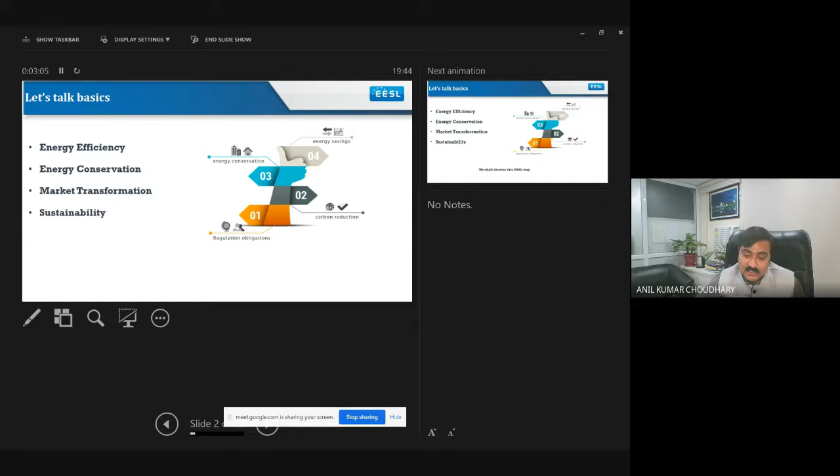We will see sustainability in some other form also in the subsequent slides. This is just to give an idea of what we will be talking about all the time in our energy auditing session. So let us discuss it.

First, let's go to the sustainable development goals, which have been defined by the UN. These are very well known to all of us: no poverty, zero hunger, good health, quality education, gender equality, clean water and sanitation, affordable and clean energy, decent work and economic growth, industry innovation and infrastructure, reduced inequalities, sustainable cities and communities, responsible consumption, climate action, life below water and on land, peace and justice, partnership for the goals. These are the things that make things sustainable basically.

Not only resource conservation and energy conservation, but all the things together make something sustainable. So if we are going for energy efficiency or energy conservation techniques, whatever the technique, we have to see whether we are meeting all these goals or not. If we are meeting all these goals, then our exercise will be sustainable. It's very clearly defined.

Let's take the first one, no poverty. How can this no poverty be related to energy efficiency? It may not be directly related, but if it is not related to the last mile person, then our efforts will not be sustainable. Even Gandhiji said that whenever you take any initiative, see whether it is going to affect the last mile person or not. So that way, sustainable development was already defined by him, which the UN is defining now.

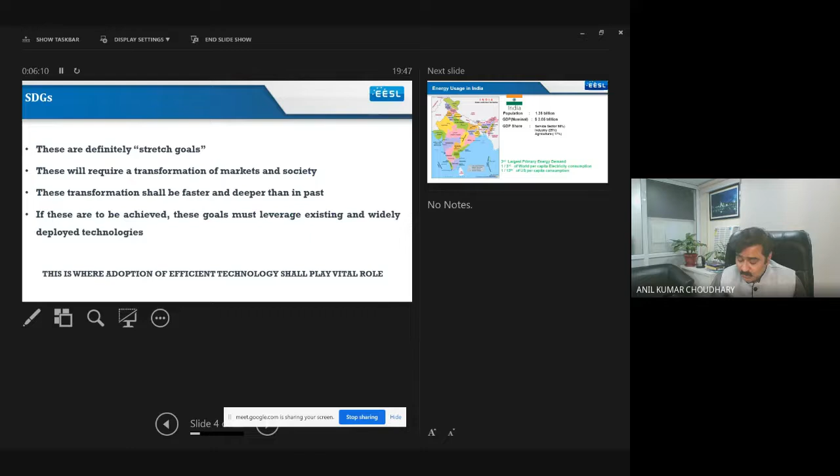These have to be very faster and deeper. Whatever, so we have to deploy these. If these goals are to be achieved, existing technology and new technologies and new ventures must be leveraged. So this is where the adoption of efficient technology shall play a vital role. So that is in a nutshell how energy efficiency and the use of various kinds of technology are going to achieve these sustainable development goals.

So if we are talking about energy, let's see what's the energy usage in India. These are some statistics. Population is there, GDP is there, GDP share is there. You see, India is the third largest primary energy demand, but it is one third of the world per capita energy consumption, and 1/10th of the US per capita energy consumption.

So on average, we are not even in the average in terms of our energy consumption. What does it mean then? It means that if we are increasing our per capita electricity consumption, our living standard and everything is going to increase. So it is going to put more pressure, even more pressure, on our energy security. That is why energy efficiency becomes even more pertinent for India, because energy requirement is going to increase anyway. So let us see the sectoral share of this.

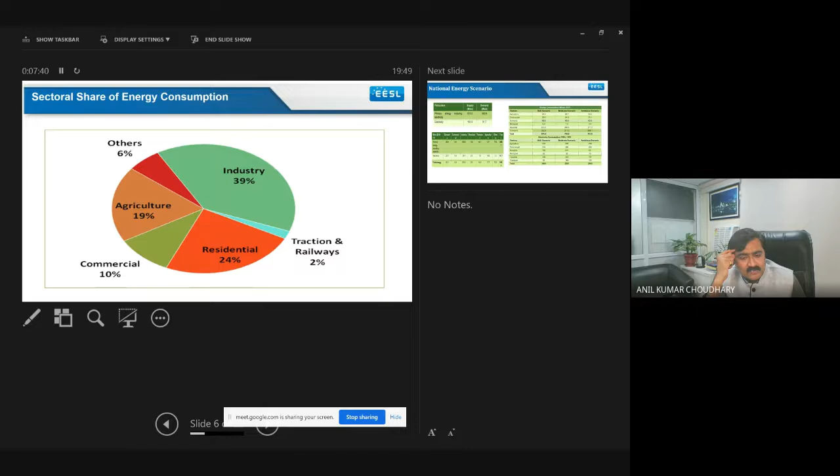Energy efficiency: industry is 39%, residential or domestic is 24%, commercial 10%, agriculture 19%, traction and railways 2%, and others 6%. So this is the actual usage. We can see how industry is affecting our energy efficiency, and residential has also got much scope, and even agriculture too.

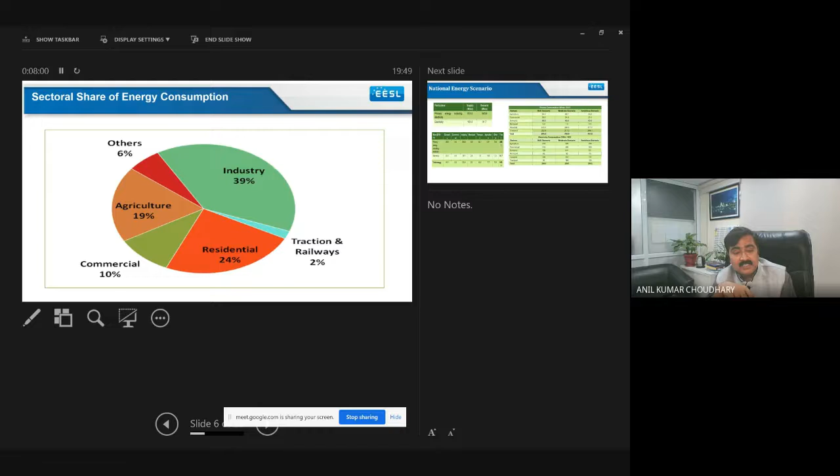And these are some figures. If you see the right hand side figures, if we continue with the business as usual scenario, by 2031 our electricity consumption is going to be 2455 terawatt hours. If we apply a moderate energy efficiency scenario, it is going to reduce to 2261. And if we have an ambitious scenario, it is going to reduce to 2193.

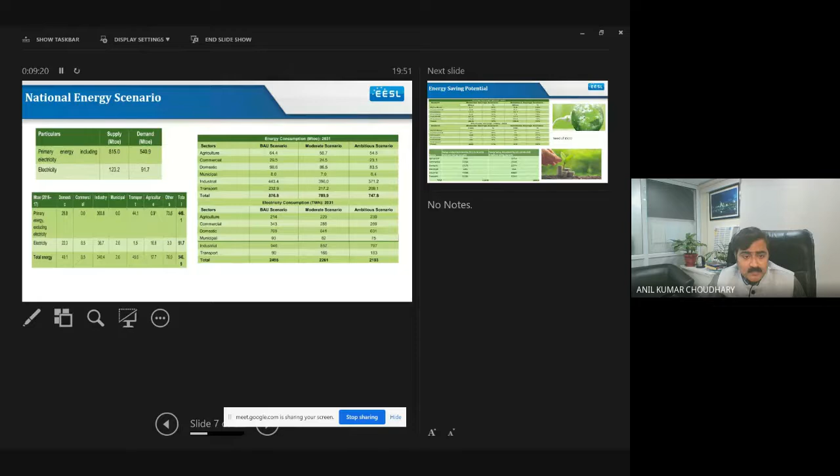In this slide, I'm telling you that this will need a lot of investment in various kinds of technology. In US dollars, around 190,000 million US dollars investment is required in India alone for this. So what does it say? It says this much of an energy efficiency market is there, this many energy efficiency companies are going to come. So this is what it indicates.

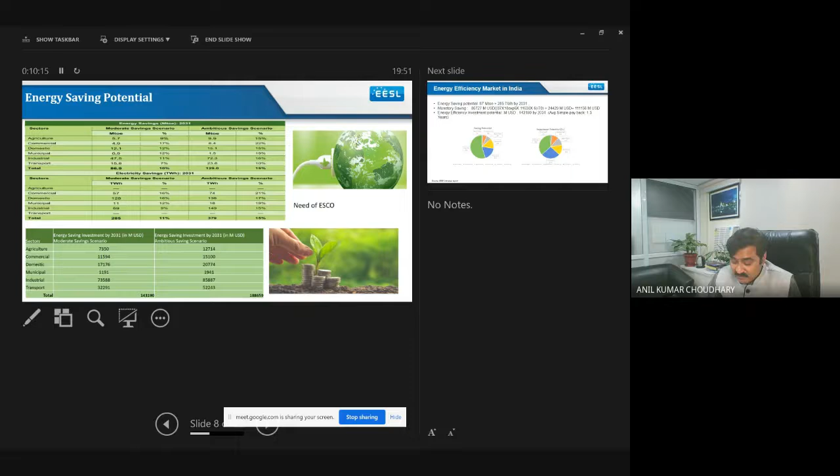And how much will it save? This energy savings will be 143,000 million US dollars. So you see, the simple payback period will be around 1.3 years. So whatever investment is made by the industry through the world, it is going to give a payback of 1.3 years.

So what I am coming to the point: energy efficiency we know, energy conservation we know, and it is a very good market potential also. That is what I am coming to. Very good market potential, and that is why energy efficiency companies are thriving, and various energy efficiency companies are getting formed, various energy advocates are being formed, because it's not only a service to the nation's energy security or the world's climate change, but also a very good market potential financially.

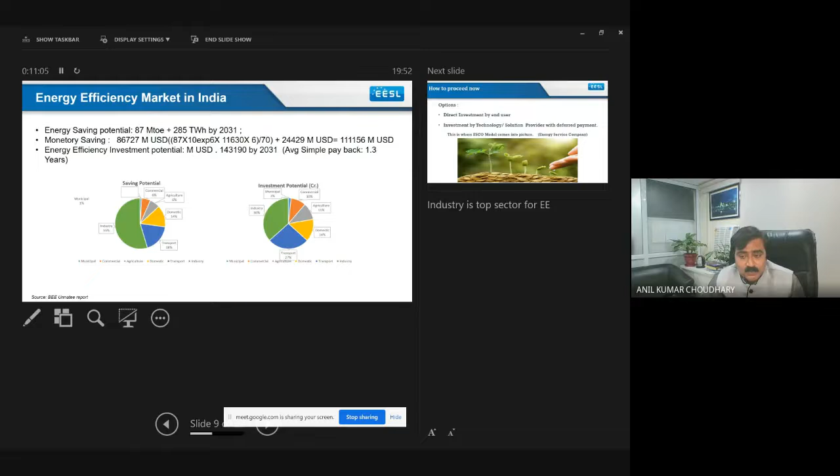So now how to proceed? One procedure is direct investment by the end user. So whoever knows that in their industry some technology is to be deployed, and that person knows if I replace my existing technology with a new technology, I will be saving much amount of energy, and my payback period will be 1 year or less than that, then that user can always deploy that technology.

So that is one direct method that a user can go for that technology and start saving energy, with a 1 year payback period. But here comes the problem of whether everyone is ready for that kind of investment. Some investments may be very high, especially in industry and various social sectors. So everyone cannot be ready for that kind of investment, and that becomes a roadblock for adoption of energy efficient technology. That is why the second option comes: investment by the technology solution provider with deferred payment, meaning the payment will not be instant. So that model comes into the picture.

These energy service companies come into the picture, which is the energy service company only, termed as a super ESCO, because it enables other kinds of ESCO companies also. So these kinds of models are getting developed.

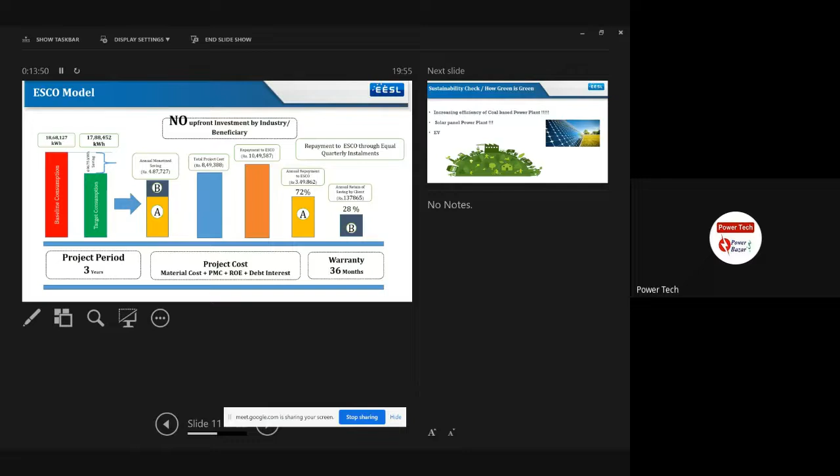Okay, so this is what the ESCO model will look like. There will be a baseline consumption of energy, and there will be savings. So the savings will be repaid over various months, and this saving will only be repaid to the technology provider. So that is what this ESCO model is.

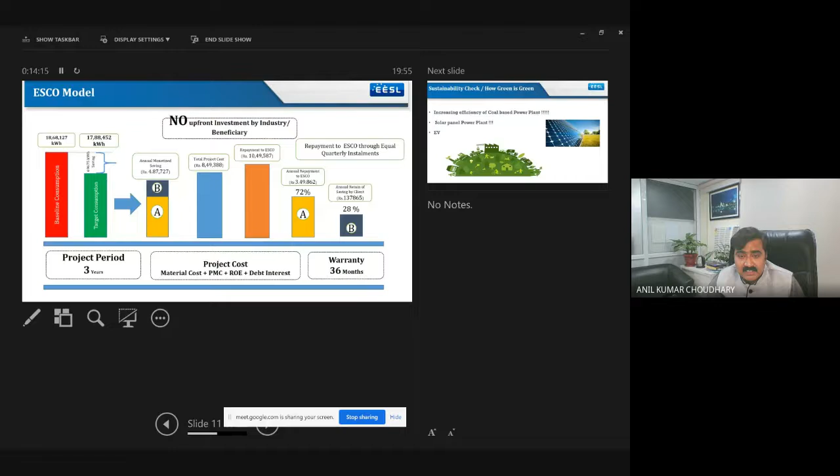So now the question is whether this energy efficiency, and market transformation that has come, is sustainable or not. You will have to question yourself whether increasing efficiency of a coal-based power plant is sustainable or not, whether a solar power plant is sustainable or not, whether an electric vehicle is sustainable or not.

This is giving you food for thought. If we go for efficiency improvements in coal-based power plants, some were working at a lower PLF, plant load factor, and a better PLF has been achieved. Still, coal is not a green source of energy, so that is not going to be sustainable in the long run.

Even if we are getting EVs, if ultimately they are getting charged by power which is thermal power based, then that is also not totally green. Though efficiency is increasing, it is not totally green, because thermal power plant power is ultimately being used instead of fossil fuel directly. So only the carbon footprint will reduce, but it will still not be a very green technology.

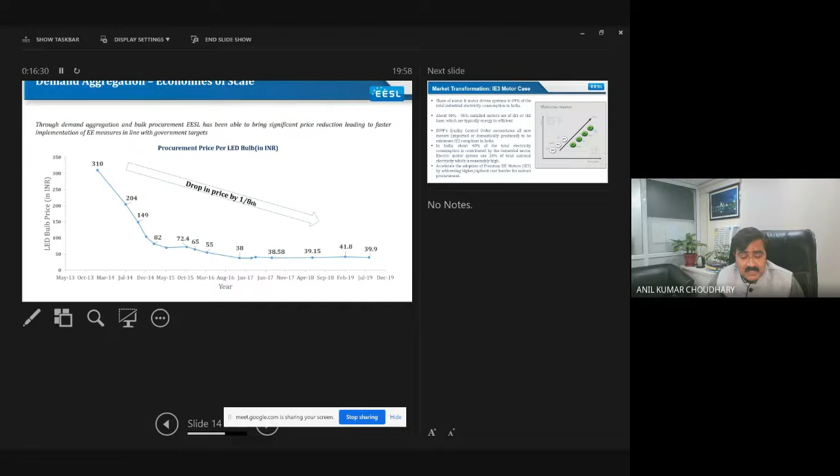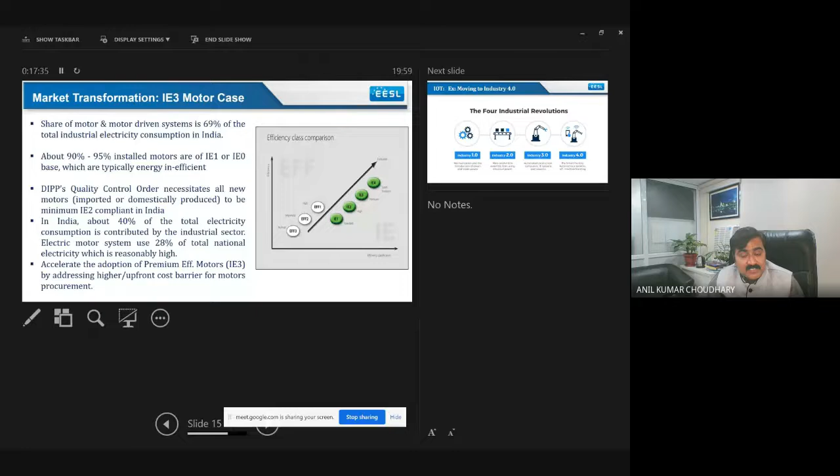India is now gearing up to make IE2 motors, but by bringing IE3 motors in a demand aggregated way, India has started adopting IE3 motors. EESL has already brought premium IE3 motors, when the mandatory statutory mandate is only IE2. So this is how we are upgrading ourselves. If demand aggregation is there, IE3 motors are being produced even by manufacturers reluctant to produce IE2 motors. So India is becoming efficient to make IE3 motors at the same price as IE2 motors. That is the power of market transformation and demand aggregation.

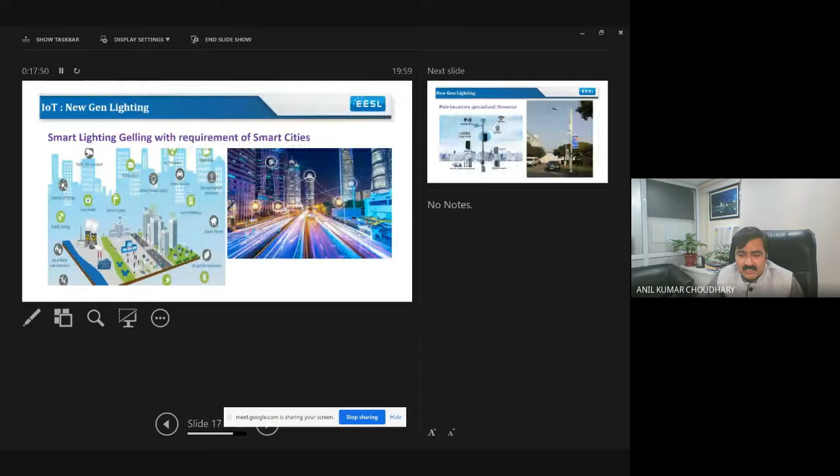Energy efficiency with sustainability is providing totally new functionalities, and sustainability is very much required. At this occasion, I wish everyone all the best. If you are wearing this energy efficiency hat, it is going to be a long way, and it will always touch all parts of our society. I wish everyone the very best. Thank you very much.

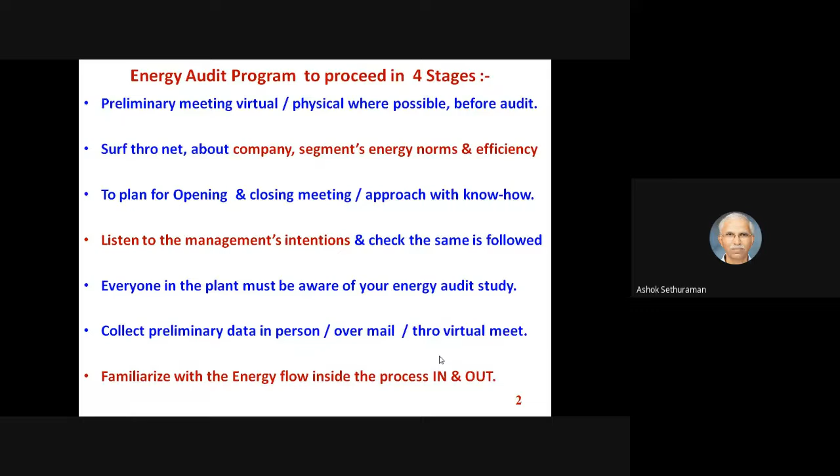This preliminary data collection—I am giving you the procedures, which will have a lot of technical inputs, and I will go into the fundamentals later in the session. This includes trailing 1 to 3 years of energy data, both electrical and thermal, and the corresponding figures of SEC, specific energy consumption, over that period.

Apart from this, when we are in the industry, we look at the single line diagram of the EB. I'll start with electricity and then go to the thermal or boiler and steam side.

Not only the electricity input or energy flow from the main EB incoming up to the motors, but also the capacitors installed at the power house, at the SSB, at the DB, and at the motors—what level of capacitors has been put in the industry.

This depends upon the linear load or the non-linear load of the industry as well. Let us go into it next.

Then the most important thing I find is the process and energy monitoring diagram or sketch—where all they are monitoring. This is more important; we can make the industry an EnMS.

Totally, we can make the industry's energy management and associated monitoring and control achievable only if energy meters are in place, with in-situ energy meters on each and every machine and motor in production and utilities. What is the sanctioned demand, and what are the recorded variations with respect to the sanctioned demand?

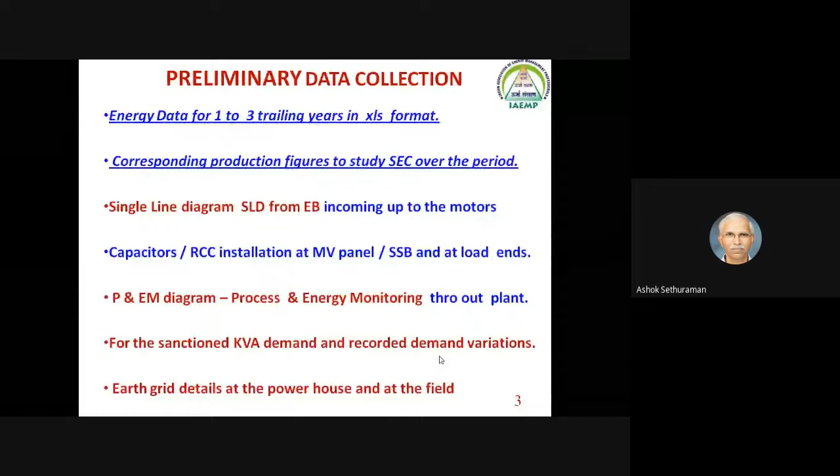The energy audit also looks into the safety aspects of the industry, including the earth grid details at the powerhouse, what is done on the shop floor, and what is done at the transformer end. These are also things to be taken care of during the preliminary data collection.

After entering the industry, let us see whether the loads are electrical, electronic, or lighting loads—what are all the types of loads. We look at the single line diagram for power factor, apart from the capacitors.

We take the case of power factor—what is maintained at the machines, what is maintained at the distribution boards, what is maintained at the SSB and at the powerhouse.

This is an area where the loss of electrical distribution can be seen visibly within the first 1 or 2 hours at the industry. The random survey of the given industry before the audit, or during the opening session, or on the first day of the audit—these are all things already available to you.

Then let us go into the industry safety norms to be maintained in the PF band. Some industries maintain around 0.95; some with a lot of non-linear loads try to maintain around 0.95 to 0.96. If it's kVAh billing, then they go up to 0.99 or 0.996.

But many of the industries don't have 3CT based APFC operation—automatic power factor control operation.

Automatically they land into the problem of leading kVRH, and ultimately voltage sagging and voltage fluctuations, and leading fluctuations also start. So each and every industry has an optimum or normal power factor band to be maintained. You look into your industry segment and plan accordingly.

Is the power quality issue from the EB coming to your industry? What is the voltage harmonics you are facing in the industry, and what is the current harmonics that is generated from the industry and thrown back to the grid? These are all the areas you see on the power quality side.

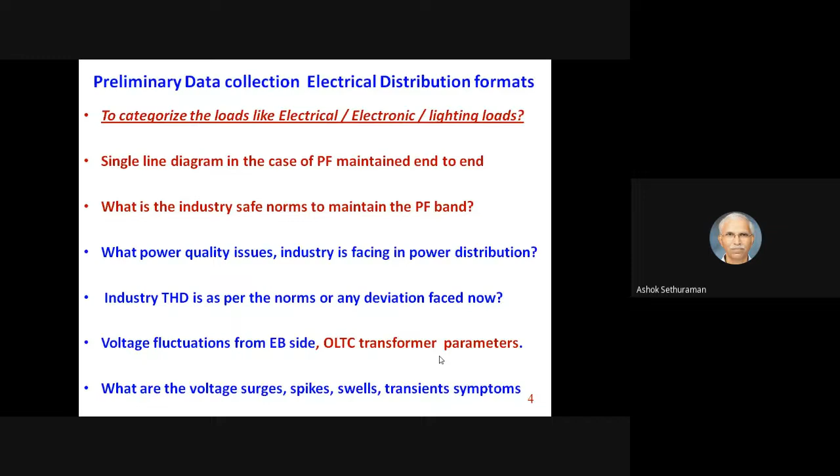It also takes care of these surges, spikes, swells, or transients. What are all these SPDs, surge protection devices, or switching surges, and how this is avoided in the industry. If it is a case of an electronic or DC drive, or more of a non-linear load industry, how it is taken care of.

Next comes these, which are all on the input side. I'm just going gradually, visualizing myself and all the audience of you entering the industry, how you are taking this side, how you are taking the random survey inputs. Having seen the electrical installation and electrical distribution, now you are coming to the loads.

Let us clarify. You have the format to be given by the industry. What is a constant torque load and what is a variable torque load? Invariably, most of the production machines are all constant torque loads, where when the speed increases, the power automatically increases and the torque is almost fixed.

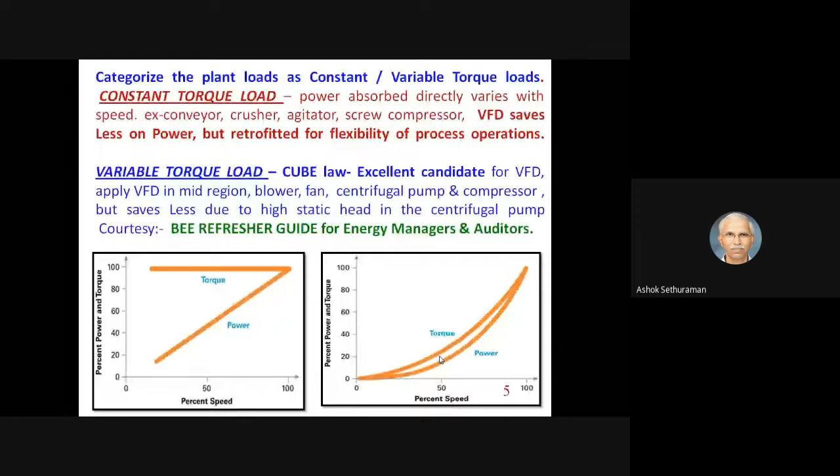So the BEE refresher guide, I will suggest each and every one of us to visit the BEE refresher guide. They have given a lot of enormous inputs on what is the updated input on this energy conservation and management. It is a good use, a good input to us.

When you enter the industry, you also see what is the energy gradient that is happening in the industry. The transmission and distribution losses, what we talk about in India, have come from 35% to 20%, whereas throughout the world they are maintaining around 4 to 6%. That is different.

But what is happening in the industry? For every 100 units per hour, that is the input given on the SEB meter, around 30 units is only delivered to the process auxiliaries, the process utilities, or the heat exchangers, leave alone the losses happening in the transformer, in the motors, in the bearings and couplings, in the pumps.

And the control valves, in the piping networks. So whatever you see, 1 unit of saving you're able to achieve at the tail end, at the load end, it is almost 3 units at the generation. So this is the area you have to look into, the idea of the energy auditor visiting the industry.

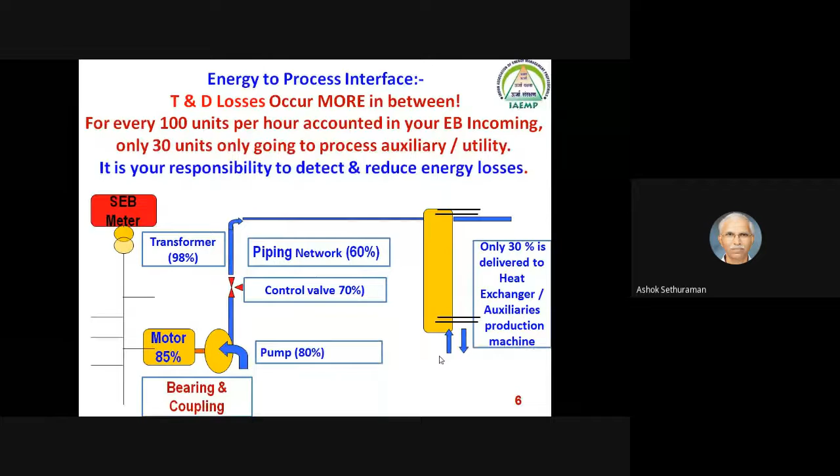It is not a fault-finding exercise to strictly say, but in another way I can say it is a fault-finding exercise only, where they are deviating from the practices, where they are deviating from their design, and where they are deviating from their norms. This is what we are going to work upon.

Coming to the next, preliminary data. The data collection is going on one side, and this is supposed to be given by the industry before you enter the industry. But if it is not given, most of the industries give it during the time of audit also. When you go in the first hour of audit, they will give all the details.

The nameplate details of all the production and utility equipment. This is more important. This will show where is the rated capacity and where the equipments are running. Bureau of Energy Efficiency always says monitor to target the energy consumption.

So the equipment comes with in-situ MFT multifunction meters. MFT meters, I'm trying to say, give the basic level of monitoring - volts and amps. Then comes the energy readings: kilowatt, kVA, kVR, kVRH, and all the aspects.

Classify the industry, whether it is VFD driven machines or non-VFD driven machines.

Then comes the motor. Loading is the first and foremost priority to decide where the efficiency loss is happening in the motor. In motor loading, if it is below 50%, it is a point to be checked again and again. Average loading means say 50 to 70 or 80%, which is optimum loading. And above 80 to 90%, because the motor also deteriorates over 5 to 10 years, if it's going above 80 to 90%, again it's a point to note and you have to take note of it.

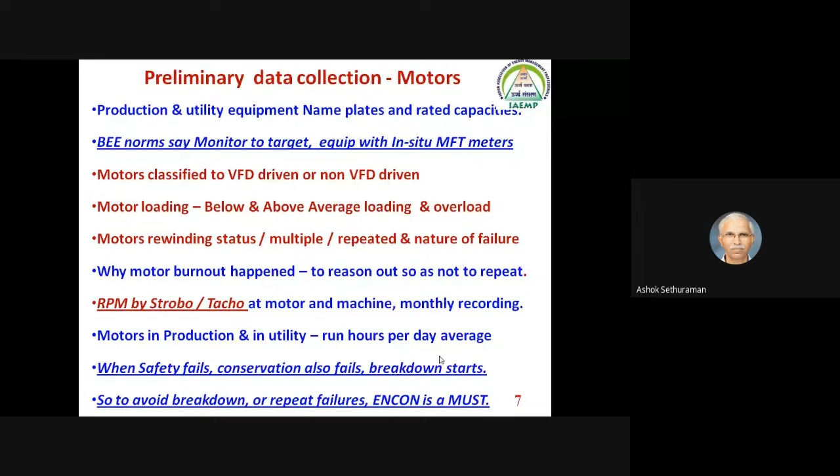So instantaneous monitoring by the thermal imager on safety aspects also helps the industry avoid failures and not repeat them. Once all the preliminary data collection is over in the industry - either before, in person, or during the first day itself - then we look for the energy conservation proposals.

It is low cost, high cost, but based on the root cause analysis of inefficiency. This is more important. Everyone addresses the symptoms that have happened, and for that symptom we give advice to suppress the symptom. That is not correct. We have to give advice to the industry in our audit report to spot the root cause and try to root out, nip in the bud, the problem in the industry.

That is why maintenance in the industry almost always involves both predictive and preventive maintenance. Most industries are doing only preventive condition monitoring, whereas as an energy auditor you have to educate the industry for predictive monitoring also, with the infrared thermal imager. And if you are doing a pump audit, the ultrasonic flow meter is also required.

And look into the subsystems of any of the production machines, auxiliaries, as well as the utilities - how much automation is done in the industry. I will go into later how the subsystem automation is helping the energy efficiency of the given utility.

Then there's the reduction of KVA, whether the power factor improvement has been done in stages. Many of the industries, most industries, do this only in the powerhouse. They don't come to the load side for compensation - that is not done in many of the industries.

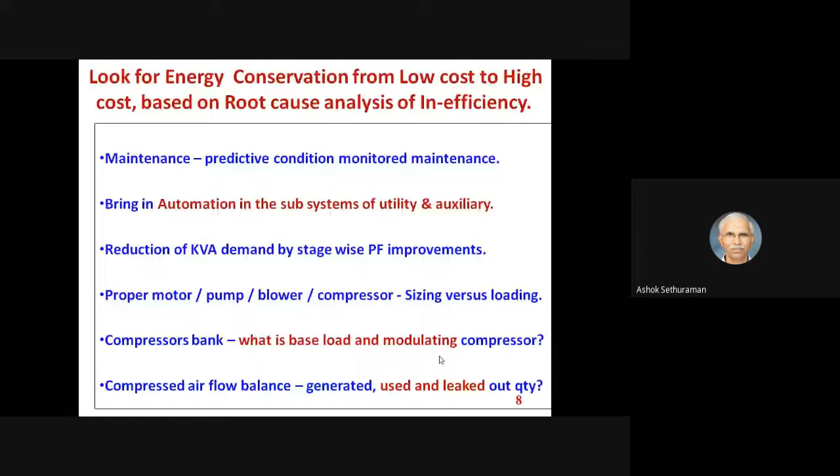Take a compressor bank - a battery of compressors, say 6 or 7 numbers, with 2 or 3 in use. What is the base load and what is the modulating load, and how are they operating? The base load should be almost 2/3 or 3/4, and the modulating load should be 1/3 to 1/4. The modulating load has to be fixed with a VFD only to pin down the pressure band. So the compressed air flow balance - what is generated, what is used, and what is leaked - that is also important.

Many industries are now giving more focus on compressed air leakage. Coming to improving the health of the system - many industries still use the MOC decided 10 or 20 years back, like MS ERW especially on their water lines or compressed air lines. Now for compressed air lines, many are going for PPR lines, and recently many industries have started going for aluminum piping. Some sophisticated, large-scale industries have gone for SS piping also.

Whatever piping you use, if it's a pump, the eccentric expander at the start of the delivery of the pump is important to look at in the industry. Whatever you see in the industry, try to visualize the internal energy flow - whether it's process flow, media flow, air, water, or whatever the process liquid is. Visualize the flow and identify the bottlenecks. What is the pain point in the industry? Management or middle management will tell you, but if you listen more to the shop floor, you will get more true inputs from the industry.

Almost all industries are losing efficiency because of belts and pulleys, thanks to V-belts. V-belts have already started phasing out and are becoming an obsolete product now. Wedged belts and cogged belts have taken over from V-belts, and they are doing an excellent job.

On the HVAC segment, air-cooled condensers are supposed to remove or exhaust heat enthalpy from the existing premises. Indirect evaporative coolers can be used as a retrofit. When you go deeper into the industry, you should also look into proposals for what can be done. Instead of just pointing to the symptom of inefficiency, you should also identify a solution so problems do not repeat and energy savings are achieved.

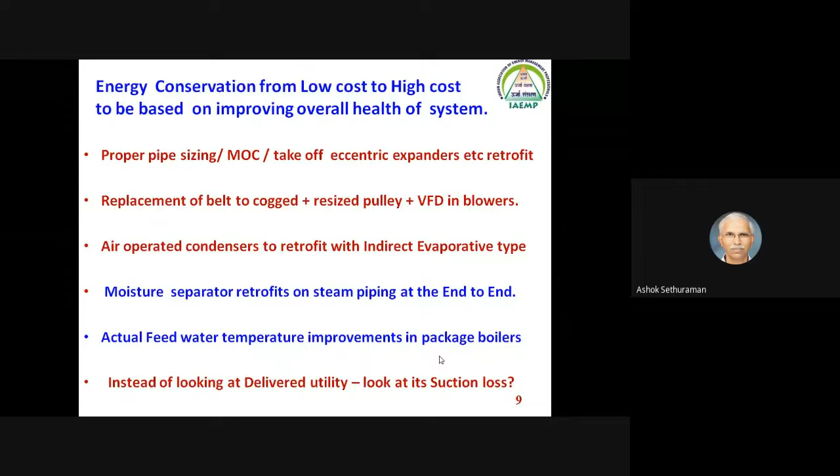So the energy audit is basically not to look at the delivery of the utility, but we are supposed to look at the suction loss that is happening in the production and utility machines.

This predictive maintenance and preventive maintenance, this predictive monitoring, has already taken over in many industries. Thanks to the infrared thermal imager, the top half is predictive maintenance and the bottom half is preventive maintenance. Industries doing this have seen potential failures that used to happen in minutes, hours and days now taking months and years, thanks to predictive monitoring. Many industries still check by pulse or smell, visually saying this is wrong or not correct - that is the old school.

The latest input to predictive monitoring is how we can do oil analysis on the gearbox or any internal system. We did a TFH audit and found the carbonization of the oil was so bad, they had not replaced it for many years. Once they started replacing the oil, topping it up and decarbonizing it, the TFH heat transfer efficiency improved by more than 20%.

That is more important. The infrared thermal imager has become affordable now. Then comes vibration monitoring, then ultrasonic waves. Sonic imaging is being used in compressed air systems - that is the latest trend. But basically you are supposed to have an infrared thermal imager for all your energy audit inputs.

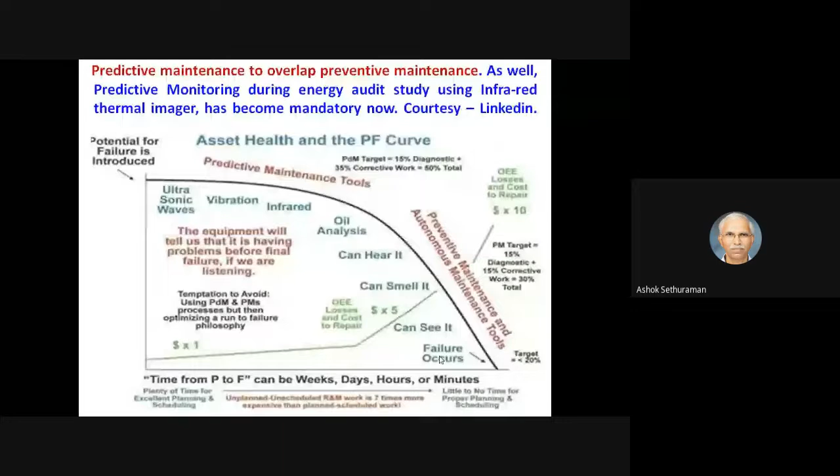The infrared thermal imager is one of the tools which can help give more proposals in your energy audit. We have been using this thermal imager for more than 10 years now. Throughout the world, industry uses it only for electrical distribution from the powerhouse up to the motors. But we have been using it extensively on all process equipment and utilities, and we could derive more energy conservation proposals from the hotspots.

In the energy flow, as per the energy conservation law, wherever the hotspot is there, wherever the energy flow is getting stuck for a given utility or production machine, that is the point of origin of inefficiency. If you are able to tap it, focus on it, and pinpoint it in your energy audit, this is more important now.

So machine condition monitoring as a system - energy and raw material - the industry production takes care of the raw material and final product output. But the energy, what is input to the industry, what is distributed, what is used and what is wasted, this is where the energy auditor has to lay hands to give a lot of inputs. So micro level monitoring of all process parameters or energy parameters daily, and macro level analysis - this is what is wanted in the industry now.

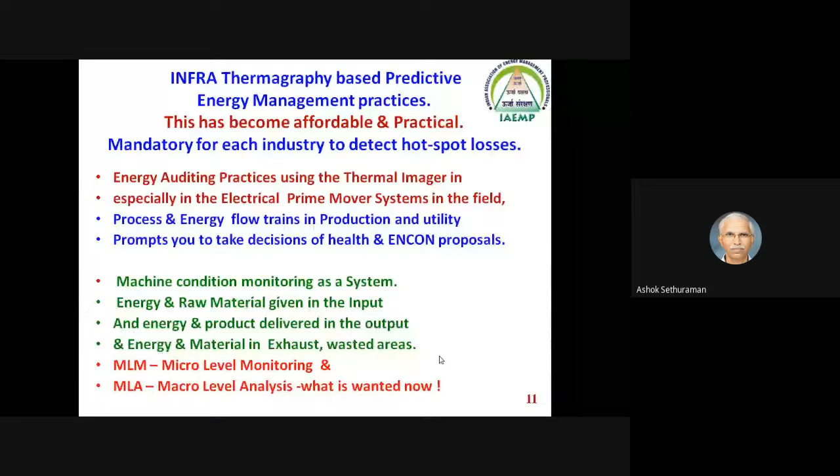Just a sample of how we have used the thermal imager, right from 2012, in motor power transmission. In many motors, our energy team engineer will first go with the thermal imager, spot the inputs, and come back to say this is right or this is wrong regarding the energy flow or power flow from the motor to the machine.

Once the power transmission is examined, we found so much slippage in the belts and pulleys - you can see almost 80 degrees of temperature in the pulleys, where the motor itself is only 60 degrees. And when the machine was started, we could find so much rubber smell was there.

See, so much of misalignment, so much of leakage, that is slippage of the belts and pulleys. This needs to be corrected, we have told the industry.

Then comes the electrical result, the compressed air side. In the post air cooler of the compressor, within the hood, if it is not working correctly or malfunctioning, or if the suction of the compressor is getting starved, automatically the delivery temperature goes up. The compressor OEM always gives a FAD based on the input given to the compressor at 20 degrees. Their FAD monitoring is done at 20 degrees, and what is delivered is at 45 degrees and above, meaning it is a loss to the industry.

Leave alone the compressor receiver, you see the refrigerated dryer. Throughout the industry we have been using it. The input and output temperature will say whether the refrigerated dryer is working healthy. Leave alone the dew point, you monitor the dew point as well as the input and output. By cooling the air, you are able to remove the moisture, and the pneumatic equipments in your industry are receiving only cool dry air to their cylinders.

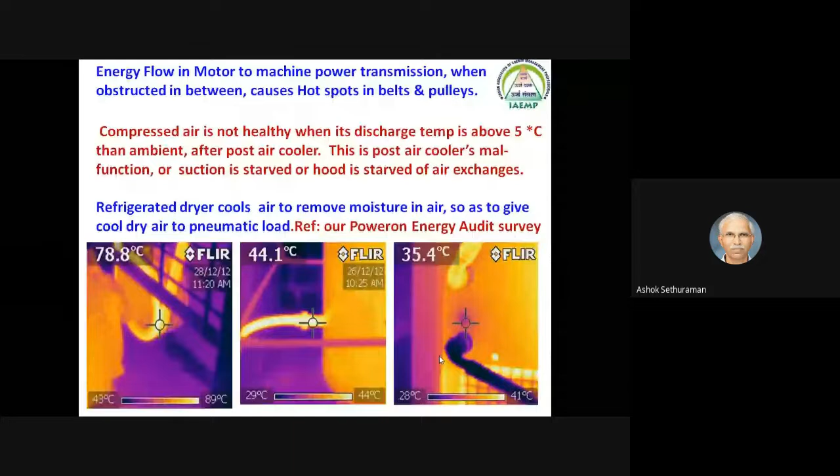This starts, say, it is not a blame game what we are doing as an energy auditor in the industry. We are trying to find the faults practically happening in the industry. The problem identification happens once the origin of inefficiency starts in the utility machines right from the installation.

You go to 10 industries, out of 10, 8 or 7 industries will have their compressor with an open hood at the top. It has to be hooded and locally taken out. If the compressor air is cool, or the compressor house is cool at the ambient temperature, say around 40 degrees, the house should also be at 40 degrees. If the house is at 45 or 50 degrees, this shows you are losing almost 5 to 10% of compressed air within the compressor house itself.

Coming to the transformers, the loading and the effects are due to linear and non-linear loads. What is the load and compensation? What have you given on the secondary side of the transformer, what is the no-load KVAR given for the transformer?

That is also a matter to the industry, especially in the COVID times. Many industries paid a heavy penalty because they did not switch off the transformer, and power factor went to almost 0.2 or 0.3, and they lost heavily.

They were paying 1 lakh as a power bill, and they ended up paying almost 1.5 lakhs towards the power factor penalty bill. Leave alone the power factor, harmonics reduction also has to be in stages. The OEMs or harmonic vendors, I don't complain about the vendors. When they talk, they want to do all the activities only in the powerhouse. Let them come to the field.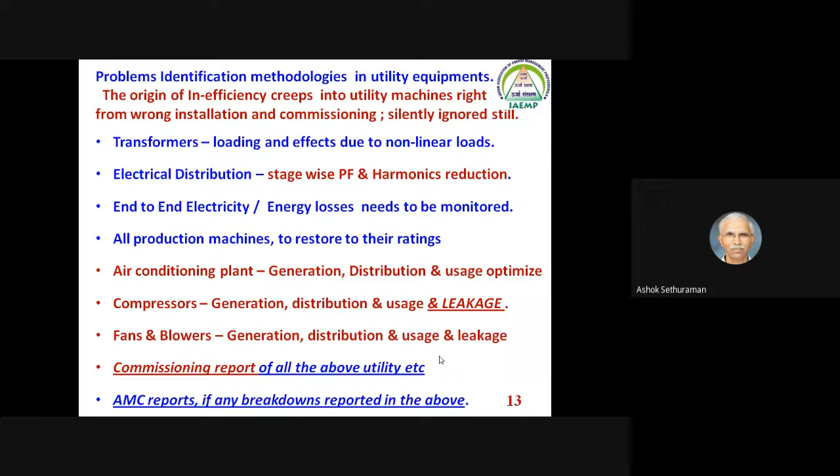Coming to the compressor distribution, you also need to see the logbooks. Reading the logbooks and doing a random survey analysis of logbooks will tell you what is the nature of breakdowns happening in the compressors.

Also, you are supposed to have a broad aerial view of the compressed air layout diagram end to end. What is the header pressure maintained? Some industries in the same segment will maintain 7 bar, some will maintain 5.8 bar, some maintain 7.5 bar. The more bar they maintain, increasing their header pressure, it means they are not able to arrest their leaks. That's why they are raising their header pressure.

What is the filter drop happening in the compressor house? That is more important. What is the delta P across the filter? What is the minimum, what is the maximum, and what is allowable? The filter OEM is supposed to educate the industry or the auditor on what is the normal pressure drop across the filters.

Then comes the flow meter. In fact, we have seen many 160 kilowatt compressors giving a delivery of 1000 CFM, but none of the compressors have a flow meter. The flow meter was provided before, it was costing more than 2 lakhs, 3 lakhs, but it has come to an affordable 1 lakh now.

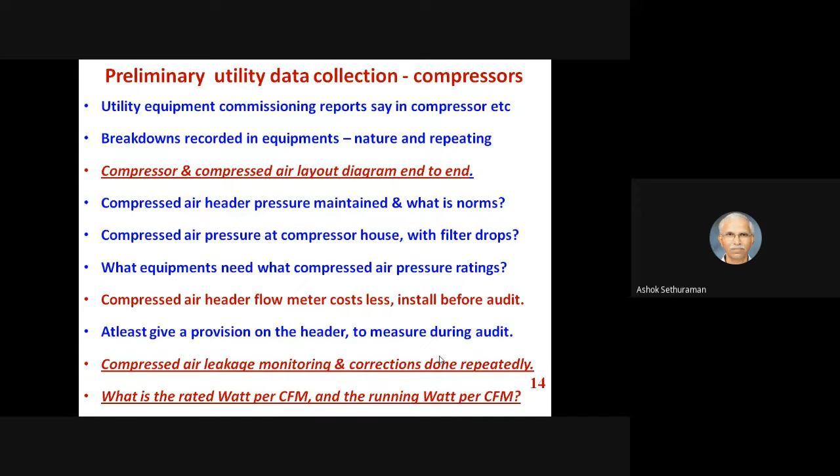And it can give you a shift-wise reading, hour-wise, or total reading, and they can take it for a month and analyze it. Ultimately, the rated watt per CFM for a given compressor and the running watt per CFM will decide whether you have to propose changing the compressor or doing modifications within it. This is an example where we have done an energy audit, based on the inputs from flow metering trends by CINDAN Tech Coimbatore.

Basically, it is a 110 kilowatt compressor, but they are using a wrong sized dryer, 600 CFM. Automatically, the pressure drop was more than 0.8 bar at the compressor house. So the suggestions were given, and it was well taken by the industry, to increase the dryer size or improve the air intake filtration. This is where many of the industries are turning a blind eye.

In fact, the IoT people can come in and have an air intake delta P monitoring and control also, with regular swapping and monitoring. The air intake paper type filters can have almost 3000 pascals buildup every 3 months. You don't allow the filter to choke to 3000 pascals. Wherever the filter crosses 500 or 1000 pascals, you start cleaning the filters or pre-filters. Automatically, the compressor will be in a healthy mood to deliver the output.

And the pressure control sensor at the compressor, the OEMs are doing it. A company from Sweden, Germany, or Switzerland can deliver their equipment because they are supplying to thousands or millions of consumers. So they give their pressure sensor within their hood, but it is up to the user or the energy auditor to educate the user, to relocate the pressure control sensor to the immediate air receiver. Automatically, these pulsations can be very much avoided if this pressure control sensor has been relocated to the air receiver.

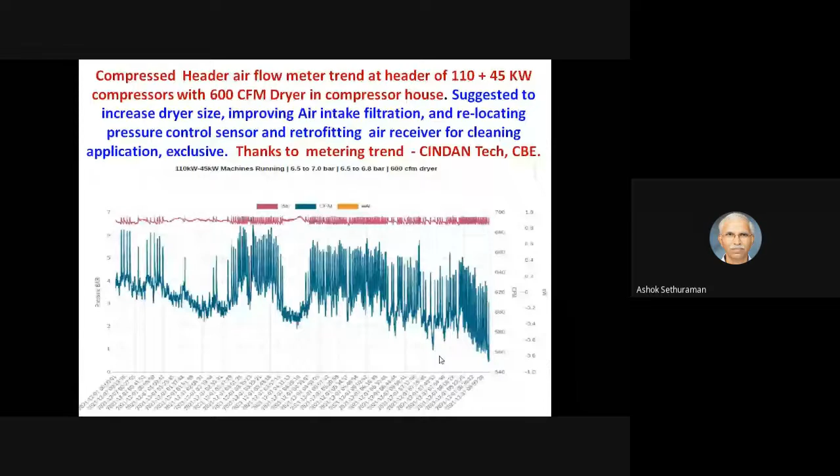And the cleaning receiver, it is supposed to have a buffer type air receiver to schedule the cleaning, as well as the cleaning type receiver also to be maintained in the compressor. Many industries are losing more in the cleaning and accelerating the aging of their compressors because of their fluctuating cleaning schedules.

Coming to the pumps, I'm visualizing you all as a part of my energy audit team. We go inside, we see what is there in the industry, preliminary data collected on the electrical side, distribution side, motor side, then compressor side, then pumps. The pumps used for heat transfer applications, the in-situ monitors or in-situ pressure gauges, the pressure and temperature gauges across the pumps at suction and delivery, across the cooling towers, across the heat exchangers.

All these inputs - many of the industries, wherever you go, almost 7 out of 10 industries, their pressure gauges are totally out of order because they are fixed on the line. Due to line vibration, within a week or within a month, the pressure gauge goes out of order.

They can as well put an impulse piping from the pressure gauge off the main line and fix the pressure gauge on a wall, giving a comfortable mounting for the pressure or temperature gauges, so that it will also indicate reliably over the span of 10 years or 20 years. The pressure gauges on the pipelines, on the compressor, or on the water circulation lines, end to end, will show the pressure drops.

The pressure drops - the BEE norms always say it's around 0.3 kg on a 7-bar line to be maintained. If it is less than 0.3, it is excellent. The MOC, the material of construction, I have already spoken about that.

The water cooling or circulation rates - I'll take a leaf from the thermal stations. Still, many thermal stations have been using 6 to 7 liters of water to produce 1 unit, and norms have been laid down for thermal stations. Now they have brought it down to 2.5 to 3 liters. This is what is happening in the industries.

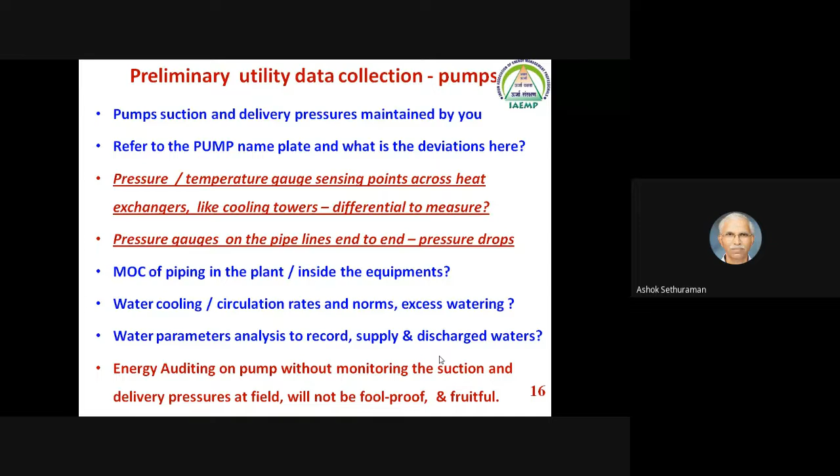Energy auditing on the pump without monitoring the suction and delivery pressures at the field is totally not worth doing - it will only be a power audit. Unless you monitor the suction pressure and the discharge pressure - the suction pressure should be measured after the suction strainer, before the pump flange - this gives an input on whether the pump is performing well. In fact, last week our Dattar was giving a lot of inputs on the pump monitoring side. This is more important.

We replaced a decade-old monoblock pump with an open well submersible pump. Many people rejected it, but we said we will do it, and we found a 7.5 kilowatt monoblock pump was replaced with a 5.5 kilowatt submersible pump. It is doing an excellent job, 20% energy savings, and the NPSH was excellent there.

So the energy auditor is supposed to look into the root cause analysis - you don't just see the delivery of the pump or the compressor. What is the FAD? The air should be delivered freely at the suction of the compressor, or the net positive suction head for the given pump should be maintained perfectly. If this is not there, if the pump is allowed to starve, or if the compressor is allowed to starve, automatically the power kilowatt also goes up and the delivery comes down.

The low-hanging proposals are very much there in every utility. It is a site visit with a keenness on studying the system. Study this as a system, not as a pump or a component. Study the cause and not the effect when monitoring energy flow.

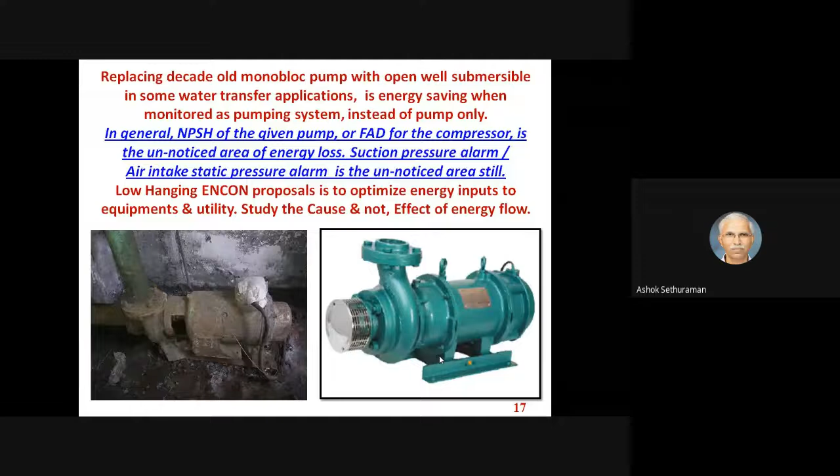Coming to the blowers, it was an eye-opener for us. Every industry or retrofit OEM does a lot of changes in the impellers, and they say we measured the flow before, measured the flow after, and achieved savings - the kilowatt came down by 20%. But in many cases we found the static pressure dropped so heavily.

The blower's efficiency should not be monitored only by the flow, it has to be measured by the static pressure in pascals and the input kilowatt. In fact, many industries don't have the blower performance curve or fan performance curve that you are supposed to have.

If you don't have it, try to retrieve it from the industry. When the energy auditor goes into the industry, check what is the band, what is the best efficiency point for the given blower or pump, from their logbooks and technical specs. That is an eye-opening point for many energy auditors.

If you are able to retrofit a VFD, this will facilitate the pump or blower to operate at the best efficiency point or best efficiency band. So make provision in all your blowers.

Tell the clients or the industry to make provision with a drilling machine. They can make holes in all the ducts leading to the blowers to monitor static pressure at the blower end and at the delivery end. Both are important - end-to-end monitoring is also important.

If filters are there across the blowers, especially on the HVAC segment, the delta P across the filters has to definitely be monitored. Only then can we give the proposal on all the AHUs - that is possible.

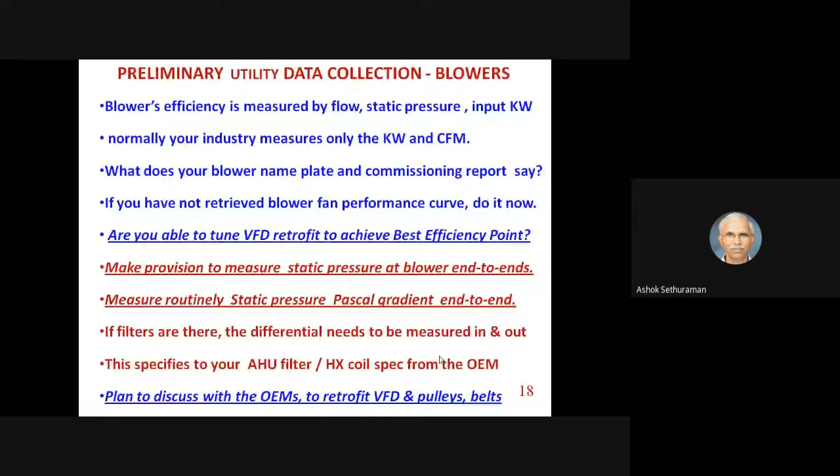You can see the fourth line from the bottom - instead of operating the blower at 35 hertz, they are able to operate at 30 hertz, and they achieved 3 kilowatt savings, straight away 20% savings, with payback in 3 months. Having invested 6 lakh rupees on these 50 blower sets, they achieved 1.2 lakhs per month as return on investment. Try to find the variable torque loads on the blowers, pumps, and compressors, especially centrifugal compressors.

Enormous potential is there for energy savings.

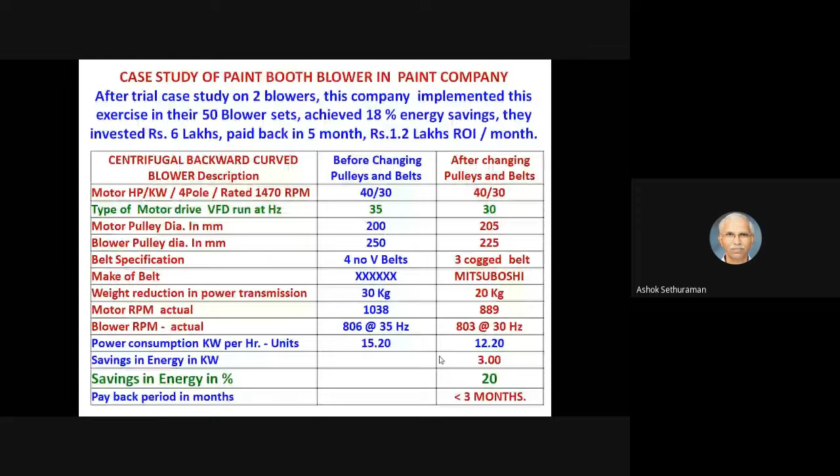I'm just covering all the parts of utility as an aerial view only - boilers and steam, the boiler nameplate and where they are operating.

The boiler is rated for 10 bar and you will be operating the iron machines, or many of the process machines at 2 bar. So what is the highest operation at the boiler house and lowest operation at the premises process house? This is important for the boiler. This is unlike the compressor.

But the BEE thumb rules are strictly followed in this industry. The flue gas oxygen trimming can be done not only for 10 ton and above boilers, it can be done for a 4 ton boiler also. The energy savings is enormous if the flue gas automation is on, as all the heat value is totally lost in the flue gas, meaning it is lost to the industry. So flue gas trimming, the automatic oxygen control of flue gas, is important.

Subsystems like feed water and fuel quality, combustion and flue - all these subsystem aspects can be automatically controlled. This automation of subsystems is more important.

Normally we are always taught: look above, look below, and look around. What is the color of the chimney? How much steam is going into the drains, and how much steam leaks are happening around. These are all boiler inefficiencies that are visibly seen, but we can also see more invisible losses.

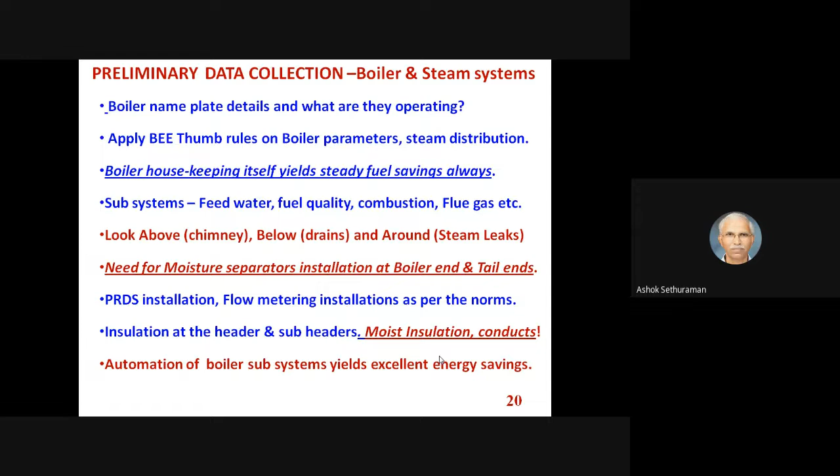Automation of boiler subsystems, on the flue gas and on the feed water - even the feed water tank control can be automated. You see that at the boiler input point where you are delivering 90 or 95 degree temperature, that is more important. You monitor with your thermal imager, that is enough for us.

As I said, it is not only used in the boiler. If the boiler is supposed to have a moisture separator, it is supposed to have an air vent, so that the air can be vented out - if the air is not vented out in the steam distribution, it will dramatically reduce the boiler or steam performance.

Once the air venting is done, within a few seconds or minutes the thermal productivity increases in a given process. So the moisture separator at both ends has to be taken care of, not only for the boilers but also sized for the compressors, where the moisture separator from the compressor to the first receiver, the air receiver, has to function fully and be properly sized.

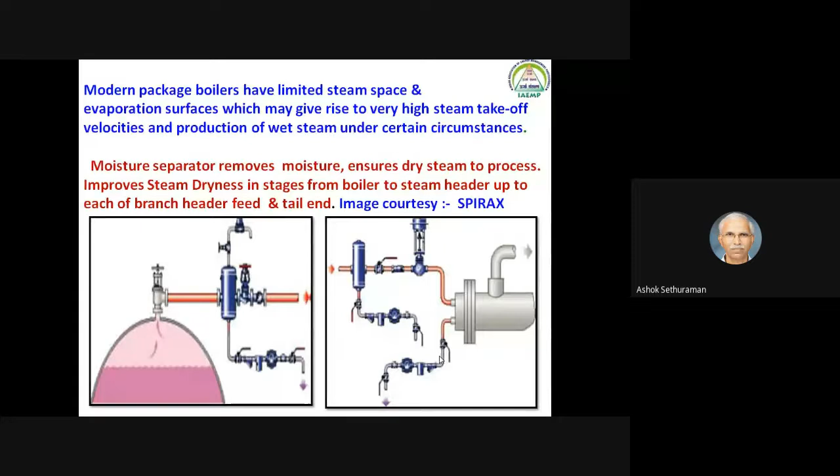So the energy auditor - I am just covering all the technical details, coming to you about what you are supposed to see when you are in the industry. You always trust the industry. Whatever the management says, whatever the middle management says, you trust them, but you always verify with your monitoring readings. The readings are more important now.

The industry is always vendor centric, because the vendor is always visiting. The energy saving vendor wants to canvass his product and he is visiting the industry. But you are an energy auditor, you are not canvassing your energy auditing - the industry has to call you to visit and do the energy audit. They think of you as an expert, and your expertise has to be fully utilized by the industry. So their mindset has to shift from vendor centric to a common mindset - logical, technical or techno-commercial thinking has to come, and common sense has to prevail in between.

The objective of the energy auditor is to bridge the gap between the design and operation of any equipment, especially in the utilities. In the process, they know very well how to overload the process equipment to get the best out of the process and more production. Every production man knows this, but as a utility man, you have to take care of your utility machines also. The OEMs always suggest about the safety of the utility machine, but as an energy auditor, you have to suggest how to run the machine efficiently. That is more important - we differ from an energy saving OEM only in this aspect.

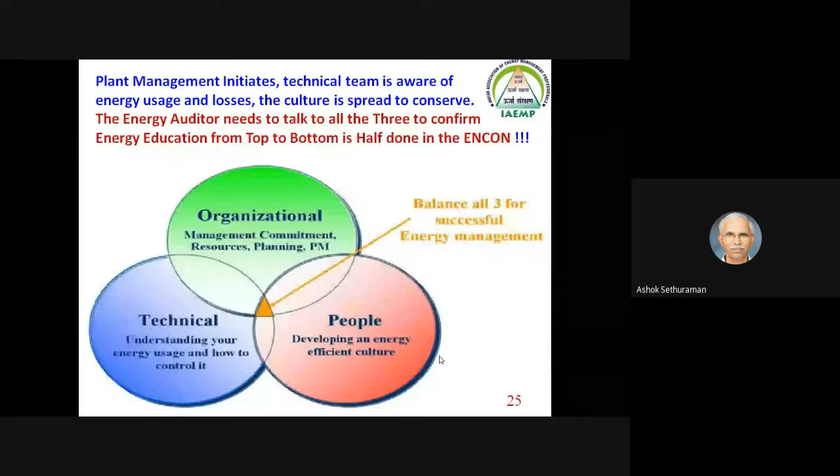So energy conservation is not only limited to the electrical department or the maintenance department, it is open to all the departments. The responsibility lies with all the departments.

You have to listen to the management, but observe and interact with the shop floor more. Then only will you get more technical inputs in the field. The maintenance, electrical, mechanical, production and quality - everyone - try to interact and maximum utilize your time.

That is more important. The industry management is always with you for the energy savings, but they are in the first gear or second gear. You have to take them to fourth gear - the energy auditor only can do this.

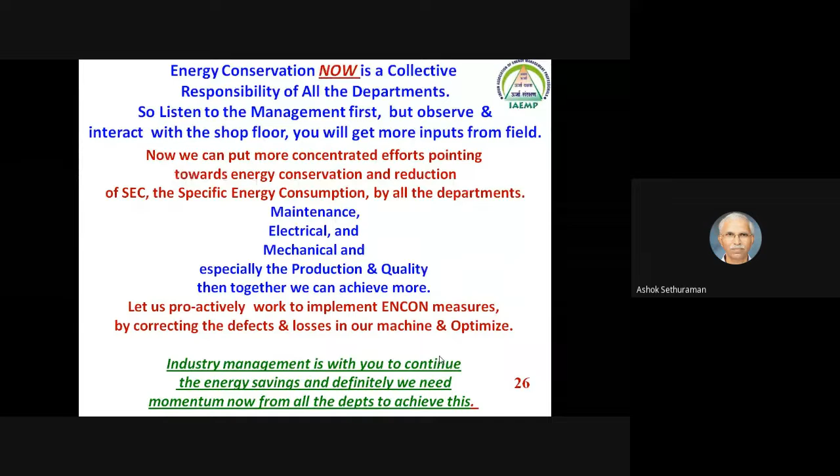So the result of the energy audit is more - the last stage which I told in the first slide, the follow-up visit for any industry, you mandatorily make it. This is where as an energy auditor you will learn more about your proposals, how they are implemented in the industry. This is reverse learning for you - what all proposals you tell the industry, whether it is accepted, whether it is done and deployed in the industry.

And the ENCON measures - when we went for accreditation, Bureau of Energy Efficiency wanted us to give the industry feedback. That is far more important for the BEE or for an energy auditor. You need that - the industry's feedback after your energy audit is more important. That is the goodwill you are generating in the industry.

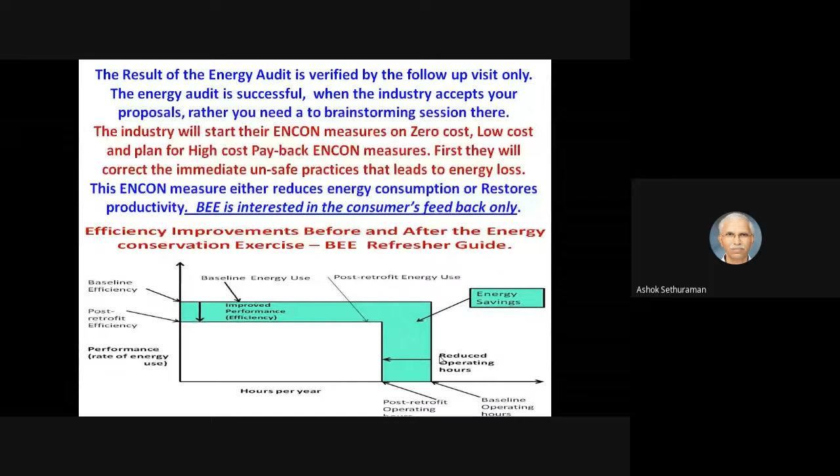Either you can increase their productivity or reduce their energy consumption. The baseline efficiency can increase, the energy consumption can come down, productivity can increase. All these aspects you have to study in the follow-up visit. The follow-up visit will be an eye-opener for you about your energy audit.

So make the industry understand your energy audit is a tool to recover the energy losses that happened for more than say 10 years or 20 years. What is the mismatch between the design and process - you are trying to address that.

So the energy auditor can only work with the industry if the management is interested. You can canvas for energy audit, but that will not work out. If the management feels there is an energy loss happening in their industry, then only will you get a call from the industry and you can do the audit.

So the energy audit can happen in the industry under prevailing conditions only when the industry volunteers, or when the government mandates - today, for all HT consumers throughout India, once in 3 years this energy audit will happen. Otherwise the energy audit will not happen. Nothing can be done as a voluntary measure - it can only be mandated. This will come as a positive thing as such.

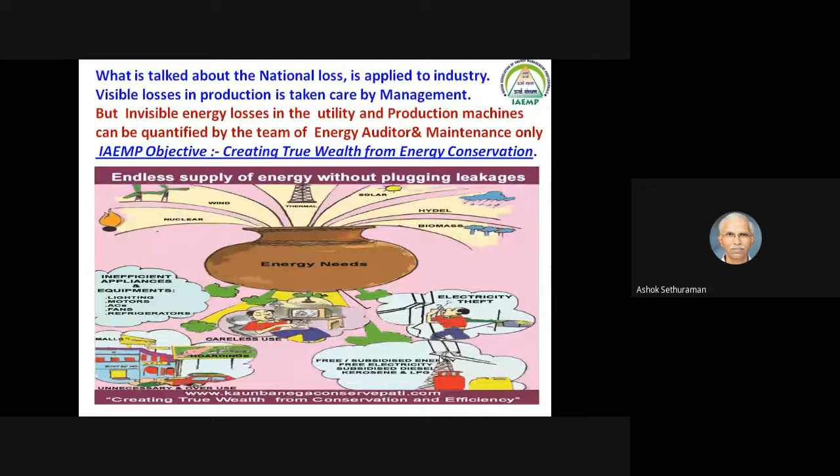This is where a team of energy auditors and maintenance can bring total productive maintenance for the given equipment, company and process. Thanks to the IAEMPs, it's an energy pot where inputs are given from different sources, but so much leakage happens - visible leakages can at least be attended to, but invisible leakages are where the energy auditor goes in and gets the job done, achieving a win-win situation in the industry.

Thanks for giving this opportunity. I have taken much of your time, up to 9 o'clock. All these inputs I have detailed in all my 4 books, and thanks to all the IAEMPians who have purchased them. Please give me your valuable feedback so that we know how to improve further. Thank you all.